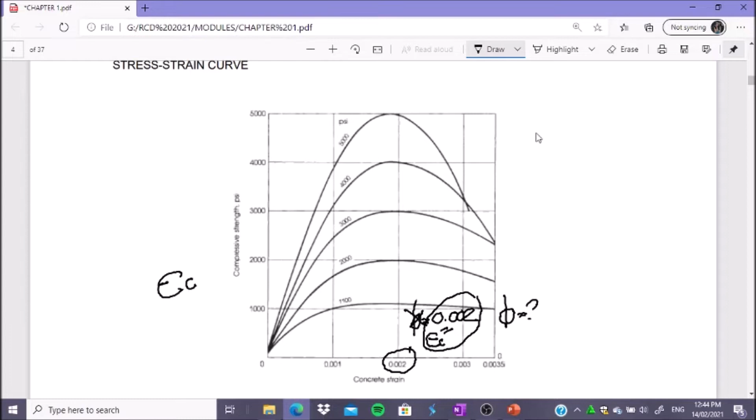Before I proceed, let me be corrected regarding the strain value of 0.002 that I discussed earlier. The strain in concrete is actually 0.003, not 0.002. So that value we see in the strain diagram is the value of Ecu, the ultimate concrete strain, equal to 0.003.

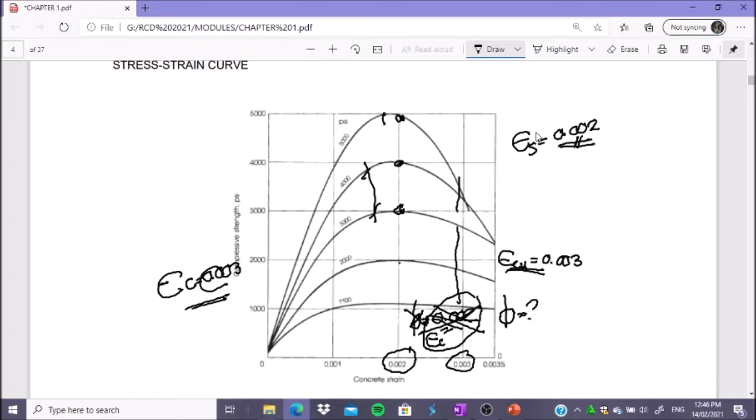Okay, so now we are on the behavior of reinforced concrete. Actually, we'll be dealing with the behavior of concrete due to loads.

We have 3 stages here: number 1 is the uncracked concrete stage, then the cracked stage with elastic behavior, and we have the ultimate strength stage or the beam failure criterion.

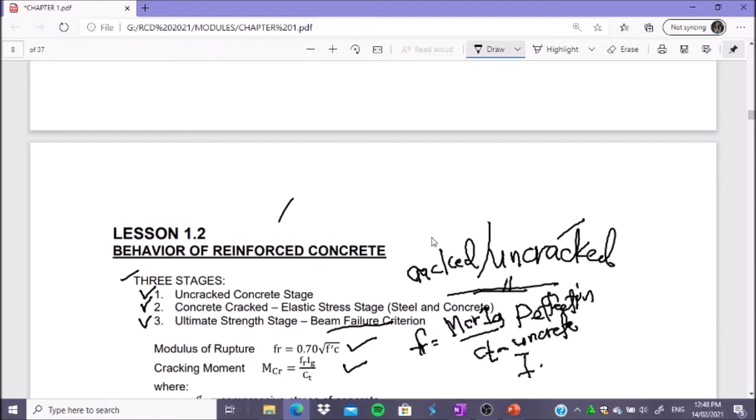The tension part of the concrete — we are dealing here with concrete, not the steel. Now, there's the I gross, which we use because this is uncracked. So we have here FC prime, FR, MCR, I gross, and distance.

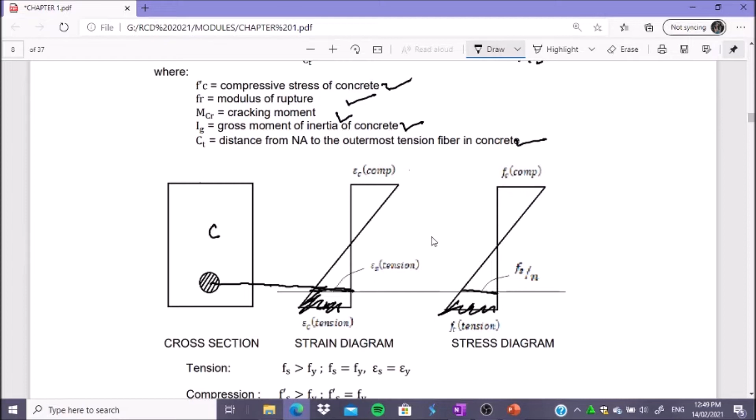But since this is still the uncracked stage, we're referring to plain concrete only. When the concrete is uncracked, it behaves as plain concrete, homogeneous. So at this level, we have strain in tension for the steel and in compression. Then in the stress diagram, we have Fs over N, and we have Fc.

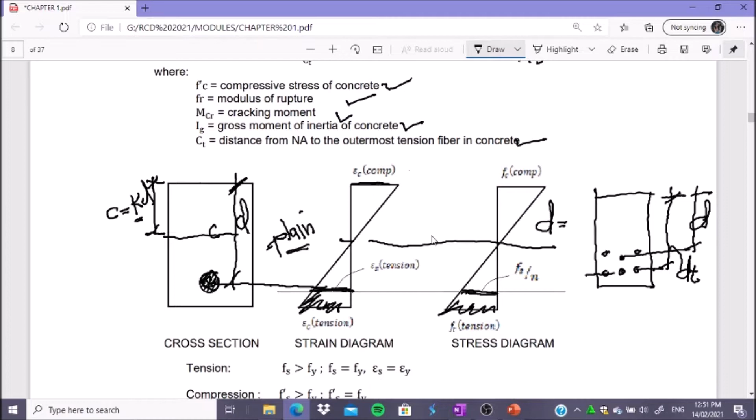Okay, now in this diagram, it says tension and compression. The designation for the actual stress in steel in tension is Fs. In compression, it has a prime, so we have Fs prime.

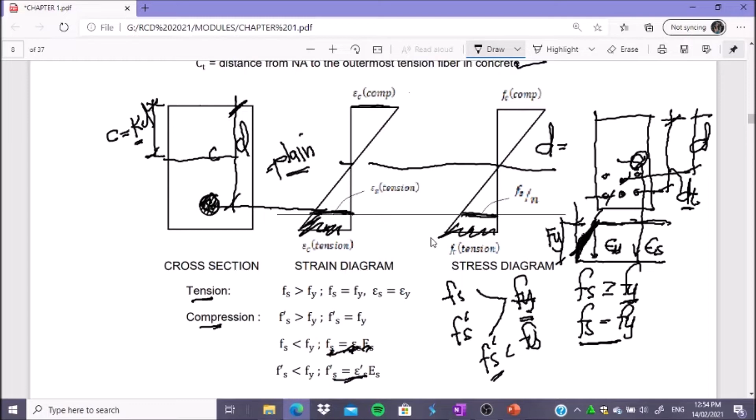It's the same here, because this is the portion that shows elastic behavior. That's why we can use Hooke's law here. As I said, Hooke's law is only valid in this region. Beyond this, it's no longer valid, that's why we use Fy instead.

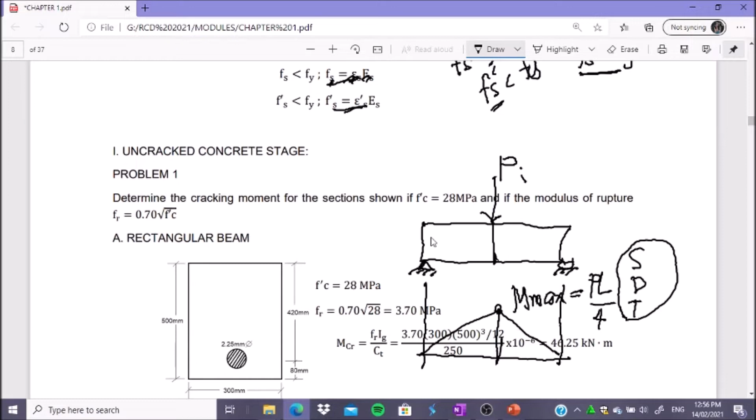So we have what we call the modulus of rupture, FR. Then from there we can get the cracking moment, MCR. So when FR is not yet reached, it means the section is uncracked. When the concrete beam section is uncracked, in computing the moment of inertia, we don't use the steel, it's not included. So it's just plain concrete, homogeneous concrete, that's why we use IG, I gross.

So if it's rectangular, our I will be BH cube over 12, BH cube over 12, centroidal.

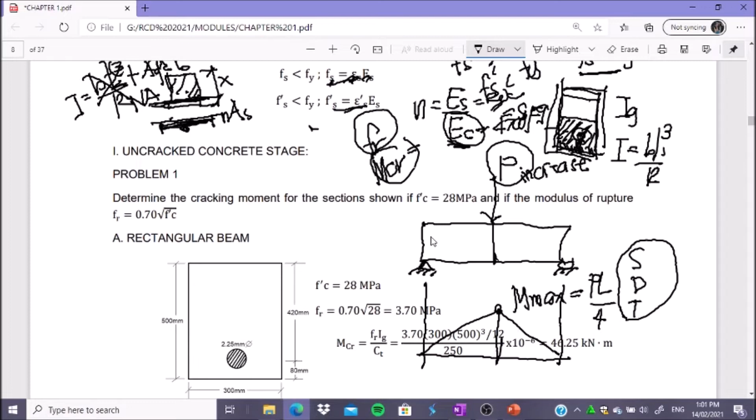As I said earlier, it starts as plain concrete, uncracked. Once it reaches the MCR, it becomes a cracked section, and we use the transformed section. For the uncracked strain diagram, as we increase the load, the stress diagram becomes parabolic, though we neglect the steel portion since it's negligible. So it becomes parabolic, crossing the neutral axis. That is now the ultimate strength criterion, which I'll explain more when we reach that topic.

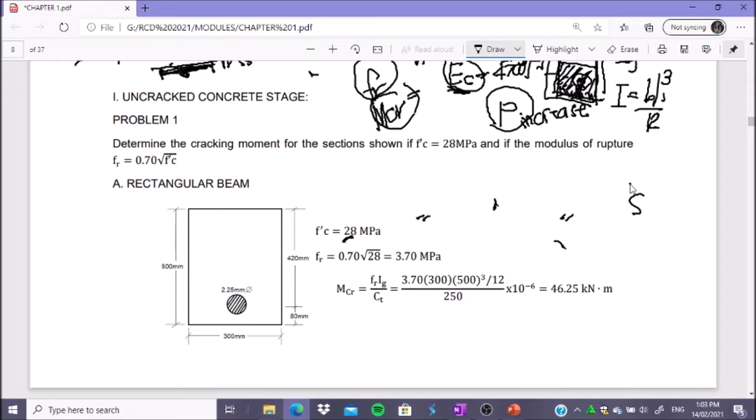Problem number 1: determine the cracking moment of the section shown if f'c is equal to 28, and the modulus of rupture fr is 0.70 times the square root of f'c. Our section is 500 by 300, with two 25mm bars. f'c is 28, and fr will be equal to 3.7. Computing MCR gives us 46.25. For IG, since the steel is useless here, we just use concrete alone to get MCR, at the value where f of concrete equals fr.

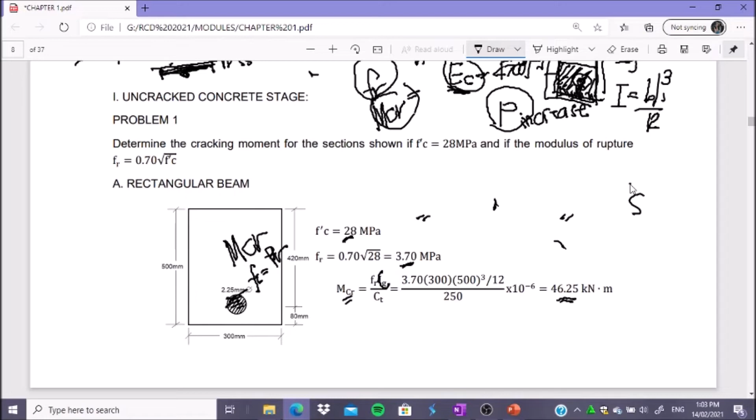Ako po, mama. Ay, sarap ng ice cream. Ice cream muna ako, ha? Kasama yan dahil... para medyo tawa kayo.

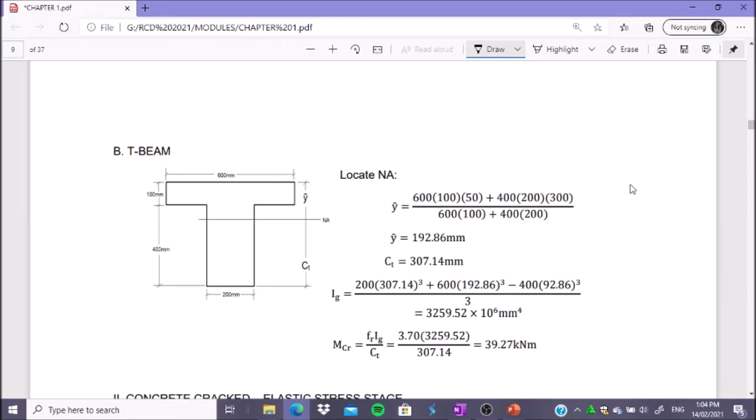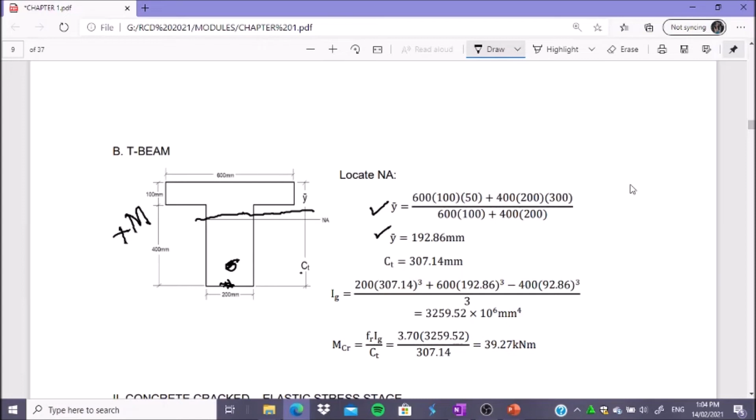Sarap. Anyway, so this is the T-beam, assuming the neutral axis is here. This is uncracked, gross section. First you locate the neutral axis using statics. Then here's the tension side, assuming the axis is still here, meaning a positive moment is acting, so tension below, compression on top.

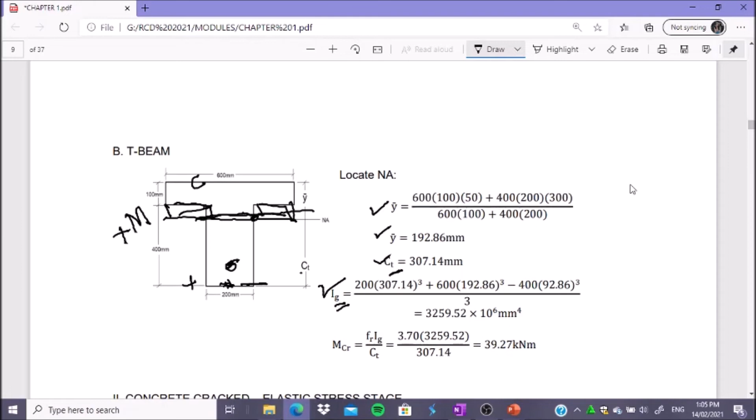CT is measured from the neutral axis to the extreme tension fiber of concrete. Then for the moment of inertia, you should already know this using the transfer formula - build it as a rectangle minus two rectangles. This gives us IG, from which we solve for MCR, and therefore the cracking moment is 39.27. No issue there.

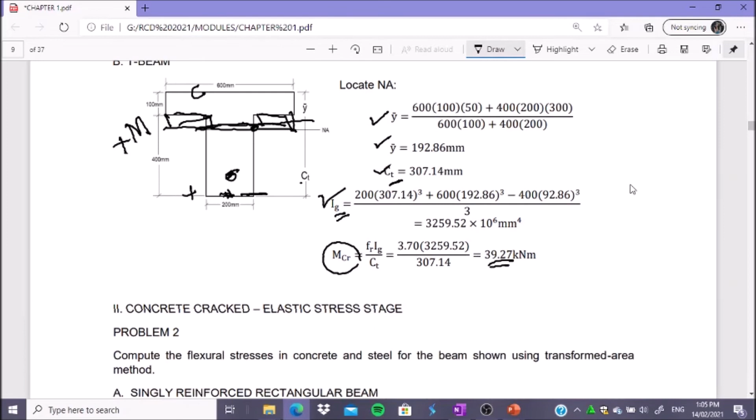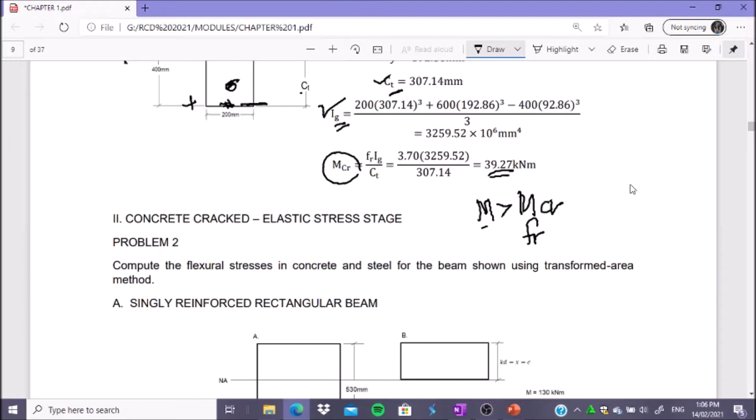When it cracks, that means the applied moment is greater than MCR - fr has been reached, so it cracks. Once cracked, the steel becomes effective, so we use the transformed section, where the depth of the compression part of concrete equals C, or C is equal to KD - this is working stress design.

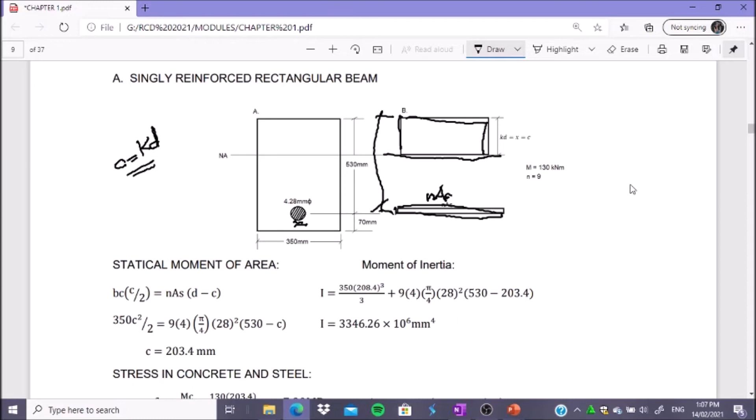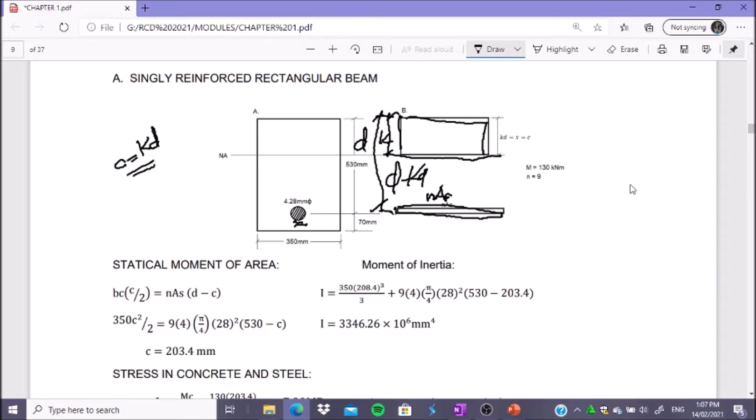Now we replace this with As, still As but multiplied by n to transform it into concrete. So how do you get the moment of inertia about the neutral axis? It's a rectangle with respect to base, BH cube over 3, plus the centroidal BH cube over 12 which is neglected, plus nAs times the distance. If this is D and that is KD, then this equals D minus KD, and that is KD.

In the solution, first you solve for C using strength of materials - equate the statical moment of area. Take the moment considering this area with centroid at the middle: B times C is that area, times the moment arm C over 2, equated to nAs times the distance D minus C. From there you solve for C, then compute the moment of inertia.

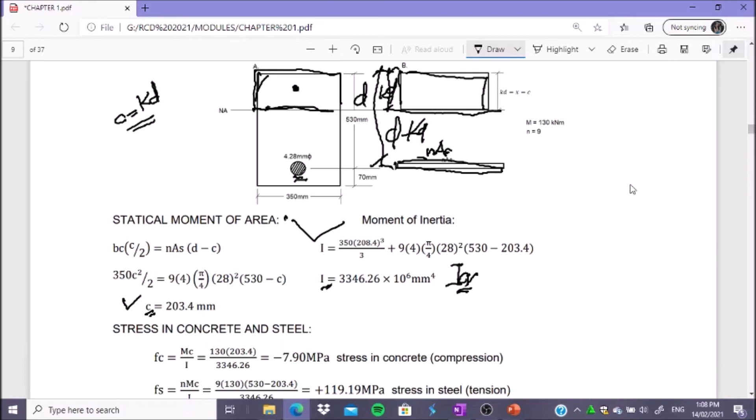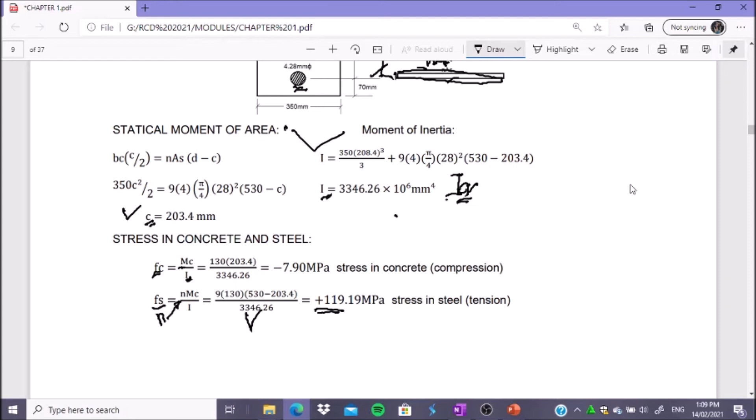Now how do we compute the stress in concrete and steel? We use the flexural stress formula MC over I. Since our transformed section is concrete, no n is needed there. For steel, fs over n equals MC over I, so multiplying by n gives fs. We have n equals 9, M is 130, C equals D minus KD which is 530 minus 203.4, divided by ICR. The steel will be positive since it's in tension, and the concrete will be in compression - the rest is self-study.

Then next we have for double reinforced. Okay, so for double reinforced, meron tayo dito ng crack. This is crack section, so meron tayo dito ng NAS. Then dun sa taas, meron tayong 2N minus 1 AS prime. Kapag in compression yan, ang natin dyan, gagamitin natin is 2N.

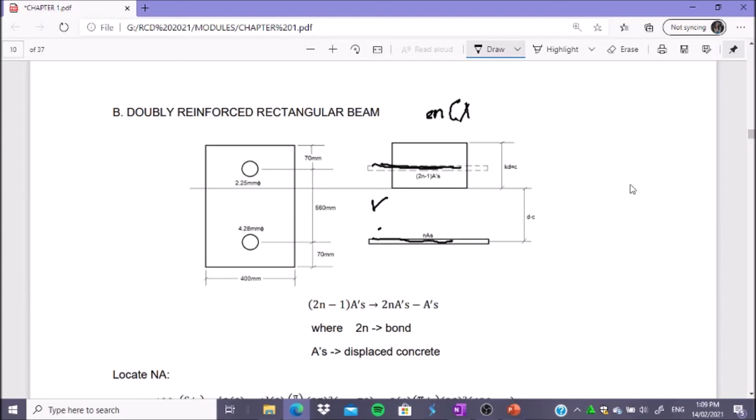Ngayon, bakit merong 2N minus 1? Kasi kumbaga 2N, we have AS, 2N AS, then minus AS prime. AS prime din dito. That is kasi 'di ba, this is in compression, effective yung concrete section. Ngayon, kung ito yung steel, 'di ba meron siyang occupied volume or area. So kaya meron 1 doon kasi kumbaga we have to subtract AS prime. Kaya dito, bakit dito N lang, doon 2N, this is in compression.

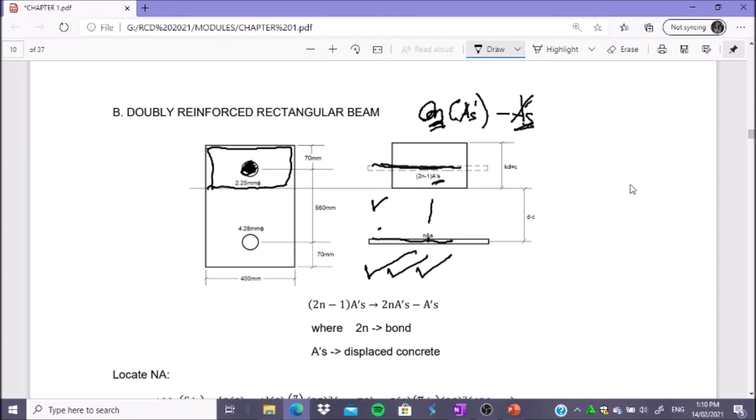The explanation there is because of bond, kaya double twice. Okay, pero may ano pa, mas may maganda pang explanation yan. Tingnan nyo sa books. Isa lang sa pwedeng itanong ko sa inyo sa problem sets or assignments. So, ito yan, ito yung explanation ko dito. Then yung 2N is dito bond. And yung AS prime will be the displaced concrete kaya meron tayo doon ng minus 1.

Okay, paano i-locate yung neutral axis? Balik tayo doon, ganito lang, madali lang. Sa concrete, BH cube over 3. Ito naman is NAS times this minus C over 2. Then ito naman, ibig sabihin, 2N minus 1 AS prime multiplied by 1 half of C. Okay, yun yung sa moment of inertia.

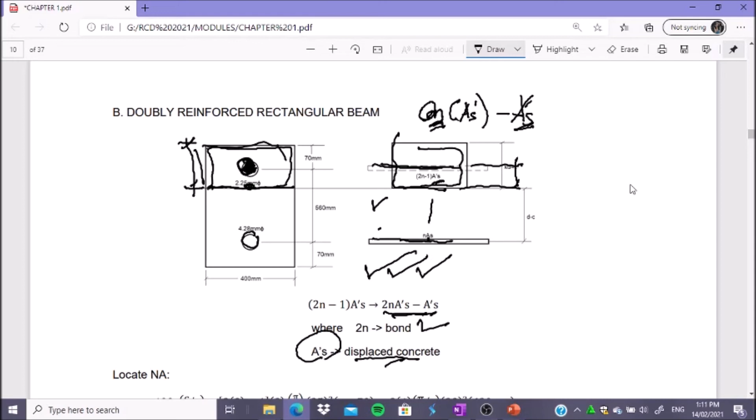Then how are we going to compute for the location X or C? Sabi ko kanina, yung statical moment of area, kunin mo dito. Moment ka dito for the concrete plus yung sa steel in compression equated to the steel in tension. Kaya makikita mo dito. So we have, this is for the concrete, this is for the steel in compression, and this is the steel in tension. Okay, so we'll get C equal to 187.

Then the moment of inertia, again, for the concrete, BH cube over 3. For the NAS, 2N, this is 2N. This is for the AS prime. And this is for AS. By the way, yung AS prime is the area of steel in compression, meron tayong prime. Then ito yung area ng concrete yung effective, kasi nga, yung area sa tension is already neglected.

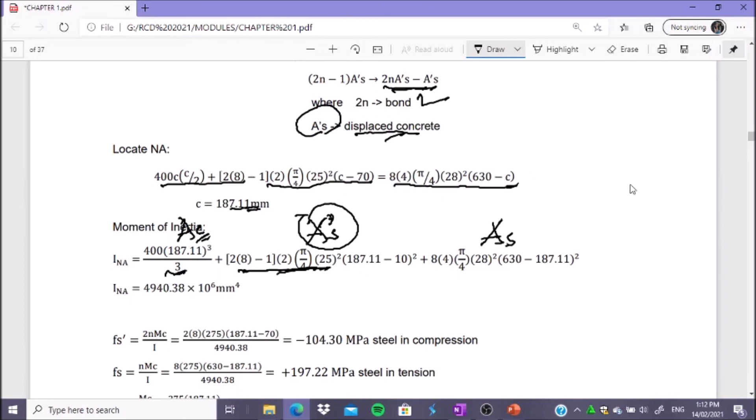Then again, for the stresses, so we have for FC, walang problema, hindi kailangan ng N. For FS, N lang. Okay, FS prime, 2N. Okay, huwag kayo magkakamali, baka magawa nyo 2N minus 1 yan. Okay, mali yan, huwag nyo gawing 2N minus 1, 2N lang dapat. Then you have this in compression, this is also in compression.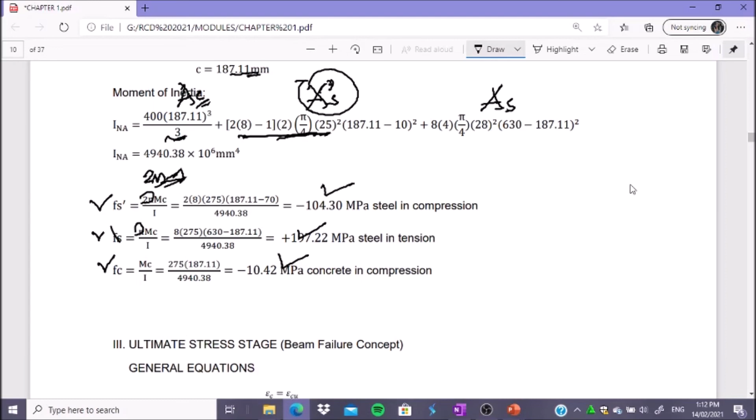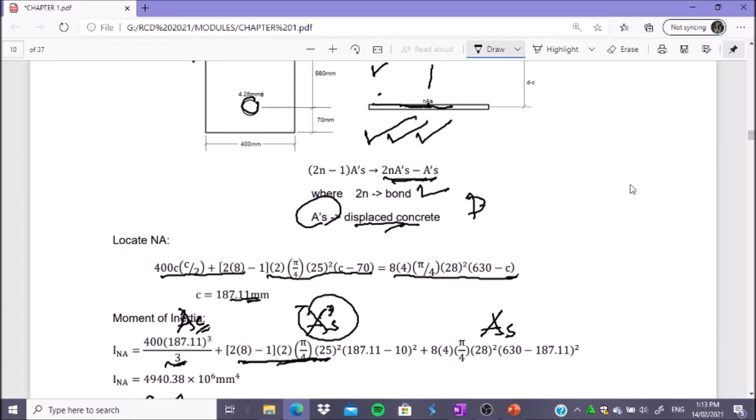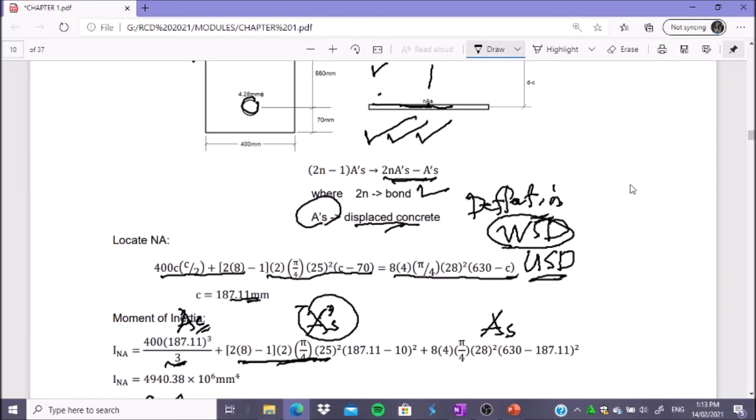This is in tension. Okay, so actually, saan natin gagamitin itong dalawa na ito, yung crack and uncrack? Okay, we will take up serviceability sa deflection. And actually, kasi mamaya sabihin ko na lang, meron tayong ano yan, yung WSD at saka yung USD. Okay, USD, so part ng WSD pa itong ano, the uncrack and crack section. Okay, ngayon, kapag in-increase mo pa yung load, ano na mangyayari?

Okay, so kanina, sabi ko ito, the stress diagram is triangular, passing through the centroid, magiging parabolic na yan. Then yung ano niya, although ang maximum, ang extreme fiber natin in compression nasa taas, yung maximum andito sa banda rito, dito sa banda rito. By studies, ano? By test. Sa strain diagram, walang problema, kasi palaging ganito yan.

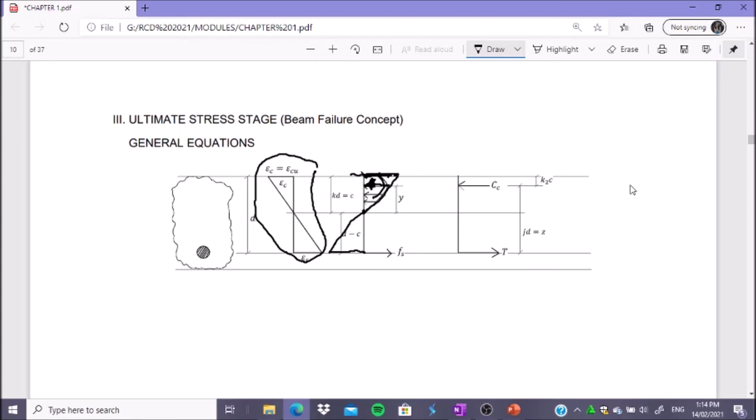Then, ito, dito, actually, beam failure concept na tayo. Diyan napapasok yung USD, papasok yung USD. So, papasok yung USD. Then, makikita nyo, if you read books, maraming na-present na diagram nito. Merong parabolic, merong trapezoidal. Then, yung pinaka ginamit natin, yung rectangular. Yung rectangular was presented by Whitney, kaya tinawag na Whitney rectangular stress distribution.

Then, siyempre, if this is your neutral axis, kapag ginamit mo na yung rectangular, ito na lang yung magiging niya, area in compression effective. Then, meron yan dyan ng depth, yan, yung depth of compression block A. A ang designation. Ito pa rin is C. So, statics lang naman actually ang solution dito.

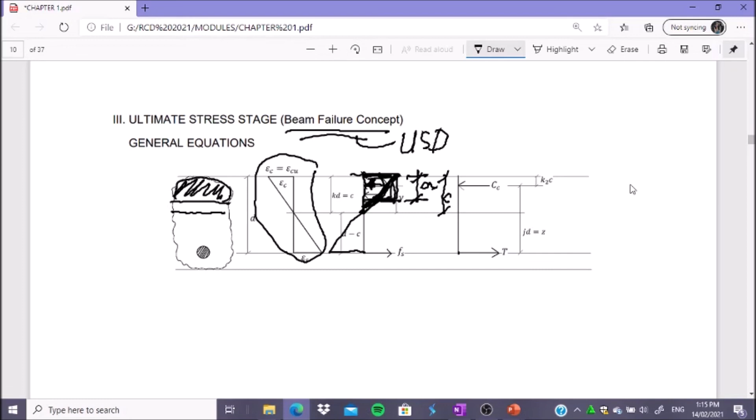Ito yung resultant ng tension sa steel. Ito naman yung resultant ng compression ng concrete, CC. Okay, di ba? Couple ito, couple. So, it will produce moment, and that is simply yung moment resistance. Then, if you take equilibrium equation, summation of forces horizontal, CC or C will be equal to T. Okay, so that is the ultimate strength concept.

Okay, so that ends our video number 2. Okay, so huwag niyo kalimutan yung sa strain ng concrete, yung 0.002, 0.003 yan.